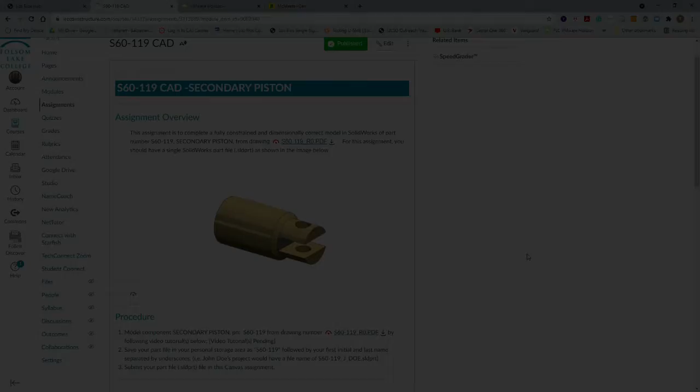Hello everybody, this is Todd Frazee again, and this is the CAD tutorial for the S60-119 secondary piston part.

Okay, so again, it's another part that'd make a lot of sense to revolve the base feature. You could extrude it and build it other ways, but I believe the least number of features would be revolving this first, cutting a slot in it, and then putting the hole through. So we're going to go to our drawing and take a look at it.

Yeah, it looks like its orientation is vertical, and in the front view you're looking straight on at the center hole, with the slot in the side view and top view. So we would start with a profile that we would revolve that would reflect half of the part. So we would be picking off these diameters and the chamfer dimension and the overall height and this 0.13 dimension.

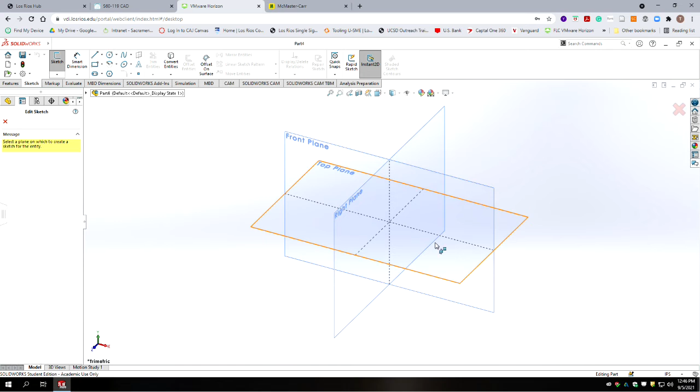Alright, so let's go to SolidWorks and set this up. Okay, so we're going to create a new part. Again, we're going to make all of our planes visible. And this time I'm going to go ahead and sketch my center line first. So I'm going to sketch a center line on the front plane from origin, and we're just going to go some undetermined amount straight up, and it's constrained vertically. Its length is the only thing that's not constrained.

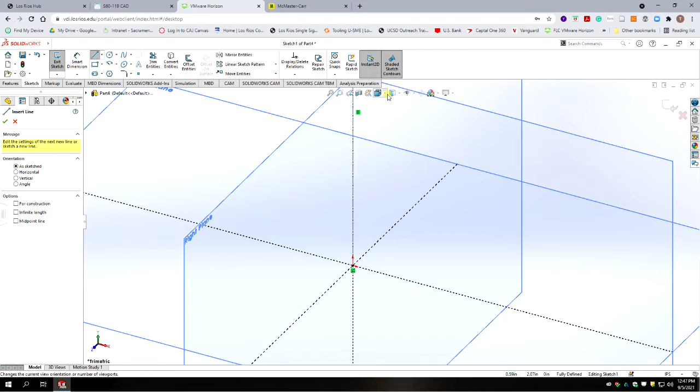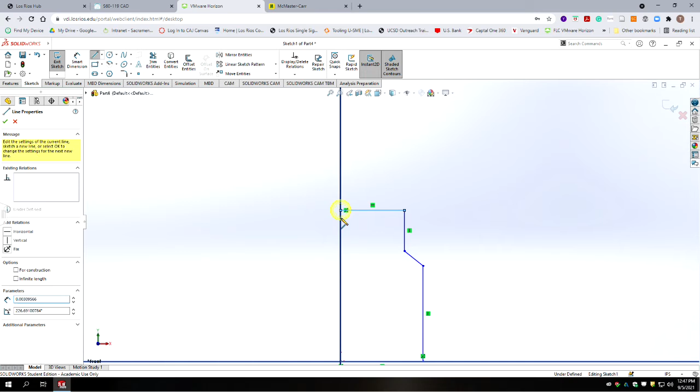And then if we're to draw the general shape of the part on the right side of this view, starting at origin, we would have a line going horizontal, one going vertical. We've got an angle. We don't really have a ledge, but we have it going straight up again to center line and then back home again to origin. So that's our general shape.

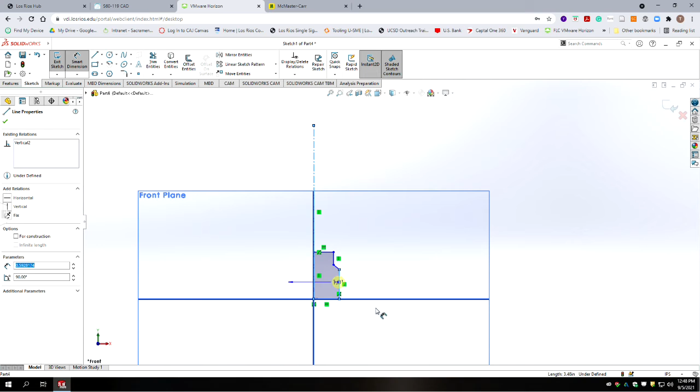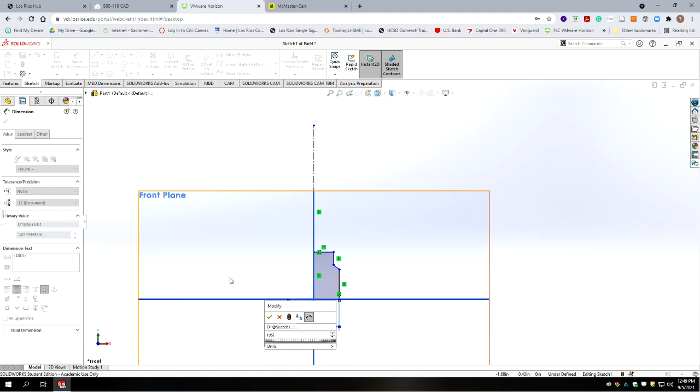Before we change the length of our center line, we want to throw our dimensions on to define our diameters. So if I go from center line to the outside edge, I can drag my first diameter, which is 0.194 to 0.197. So we're going to shoot for the center of that, 0.1955. Okay, so we've got our large diameter.

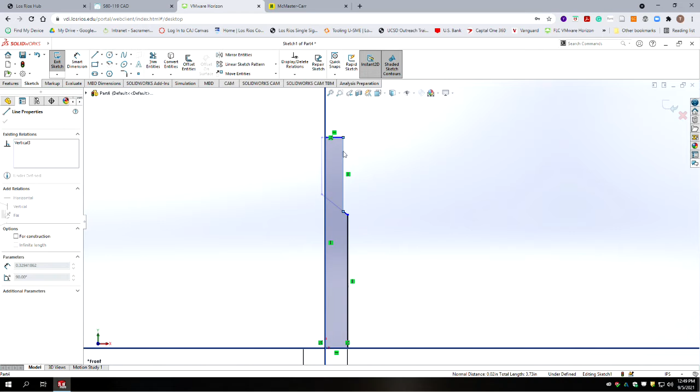You see this got a little funky, and that's just because of the scale of the dimension that changed. And this line is now on the wrong side of my center line. So I'm gonna exit dimension mode, and I'm just gonna drag that back over to the correct side. Okay, we're not gonna get too worried about it.

And then we're gonna do the same thing with the next diameter. We're gonna select the center line, and then we're going to select our smaller outside diameter, drag to the left, gives us a diameter. And if we go back to our drawing, that diameter is 0.157. And that gives us the proper diameter.

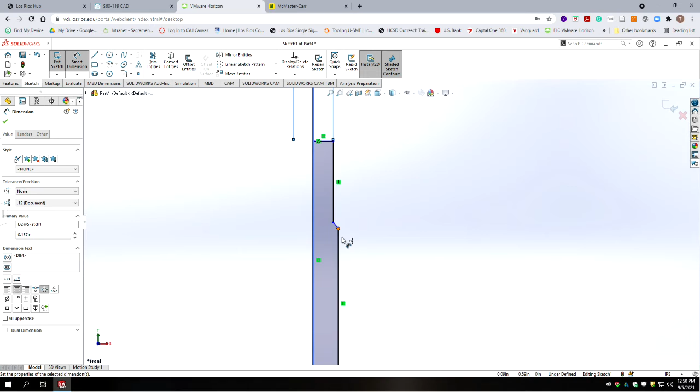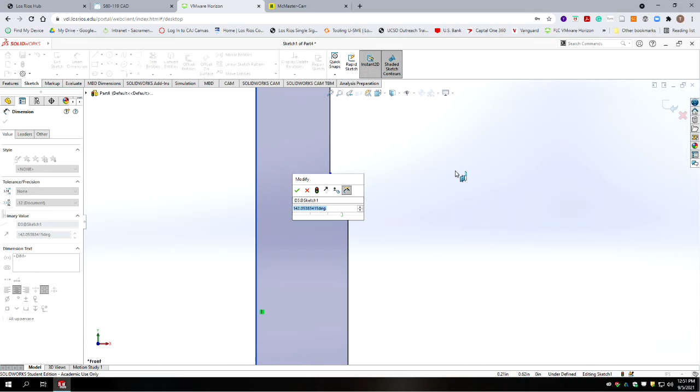Okay, so this angled piece here, or chamfer, we need to put a dimension on its angle. And it's a 45-degree chamfer, but with our angle tool, we're getting an included number. So it's really 90 degrees plus 45 for an inside dimension. So let's go 90 plus 45, and it gives us 135, which is the included angle we've got there.

Okay, and now we should just need height dimensions because we haven't put any in. We go back to our drawing. The overall length of the part is 0.43, and then the distance between the top of the part and the top of the chamfer is 0.13. Start with the smaller dimensions first, or it smashes your sketch up and distorts it more as you're working on it. So I'm going to start with the 0.13, which is the dimension between here and here. So 0.13. It's going to get real short.

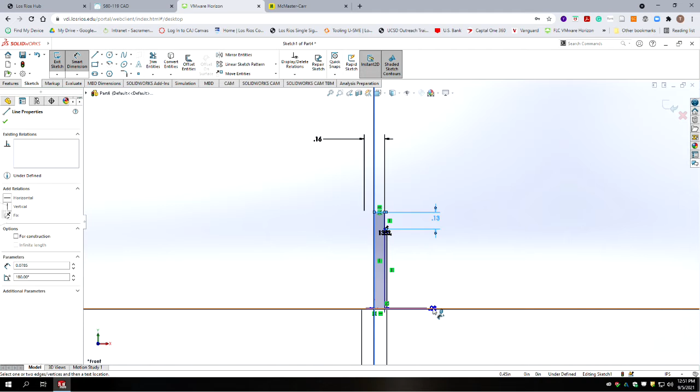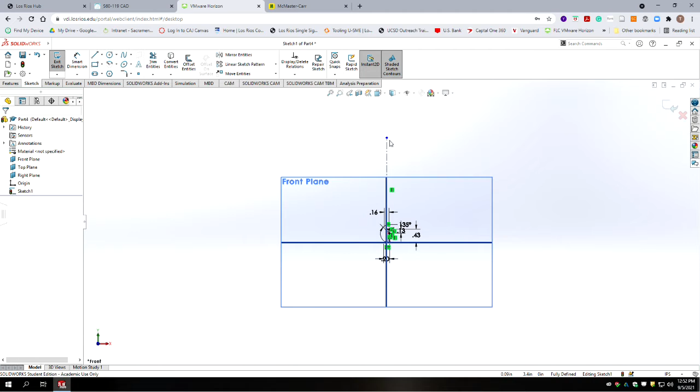And then we're going to do the overall height from the top all the way to origin plane. And that dimension is 0.43. Alright, so we should have everything constrained except for the center line. So let's go ahead and drag the center line down until it merges with the top of the part, and we should have a fully constrained sketch. This is what will revolve.

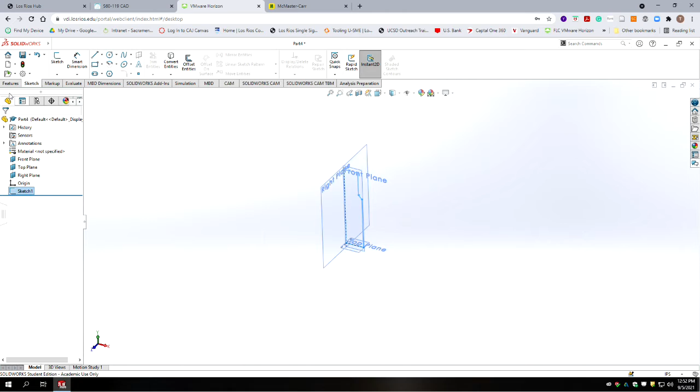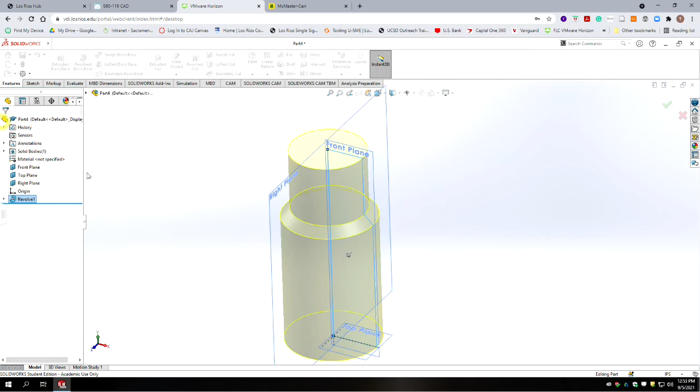So I'm going to exit the sketch. I'm going to rotate to a 3D view. We're going to keep the sketch highlighted, and we're going to go to Features, and we're going to make a Revolved Boss/Base. And it looks like it's auto selected, but if it doesn't do that for you, just select the left vertical line of the part, and that'll be your revolve. You want to go 360 degrees, accept that, and we have our base feature. Now, like before, I'm gonna make the standard planes invisible again.

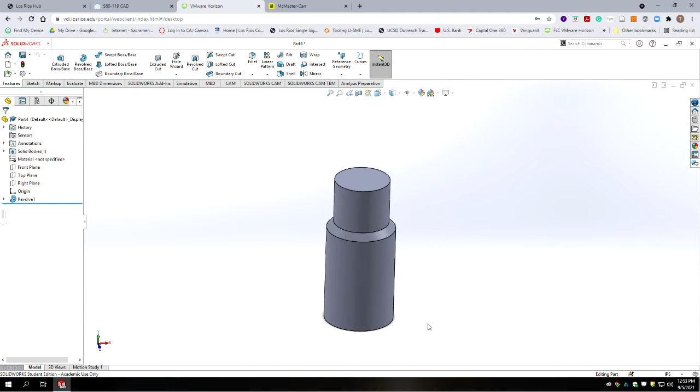We may turn individual ones on, but it's just a little less cluttered. Okay, let's go back to our drawing. If I were to look at this in the front view, what features would we see in our drawing? So we have a hole that goes all the way through, and we have a slot.

on both sides. So we're going to take this 161 to 159 number, and the number that would be halfway between there would be 0.160. So we're going to model our hole at 0.160, and it's going to be 0.059 from the end. So let's go back to SolidWorks, and we're going to make a sketch, and we're going to make it on the front plane. So we can still select it even though it wasn't visible off the feature tree.

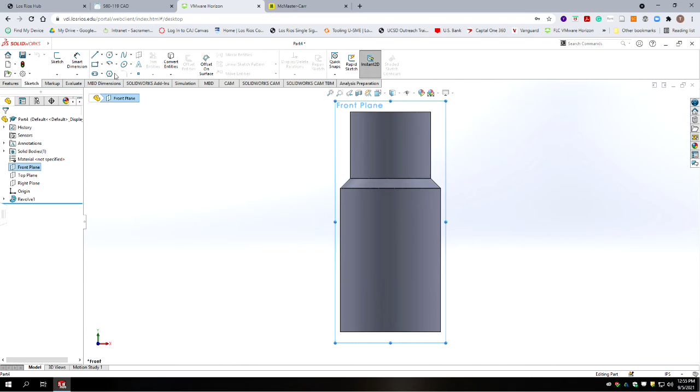And we're going to make a circle, and we're going to draw that in the plane. And we can take a center line, and we can go from origin to the center of that circle. And if we force that to be vertical, it should be in line with the axis of the revolution of the part.

And we're going to go back to our drawing and see where the location is. And the dimension for the center of that hole is 0.059 from the end. So we need to put in a dimension from the end. 0.059, accept that, and then we just need to give it a diameter, which was 0.06. Okay, so we should have a fully constrained sketch.

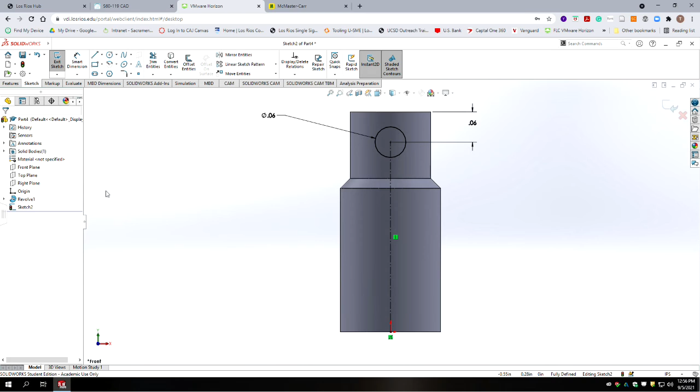We're going to exit the sketch, make sure the sketch is highlighted, and we're going to look at this from a 3D view. Now you notice the sketch plane for the front plane runs down the center line of the part. So what we're going to do is a feature. We're going to do an extruded cut. And it defaults to one side, of course, and blind. So we're going to make that through all.

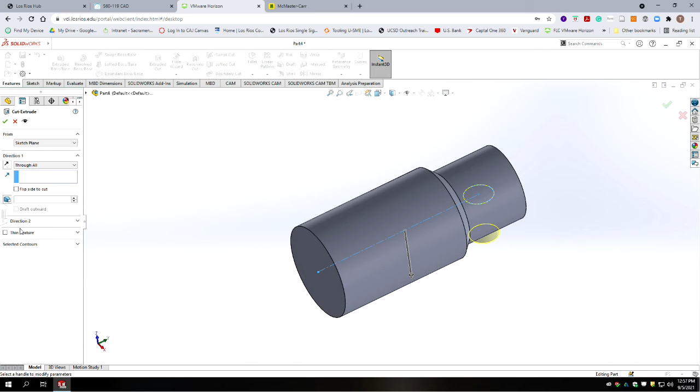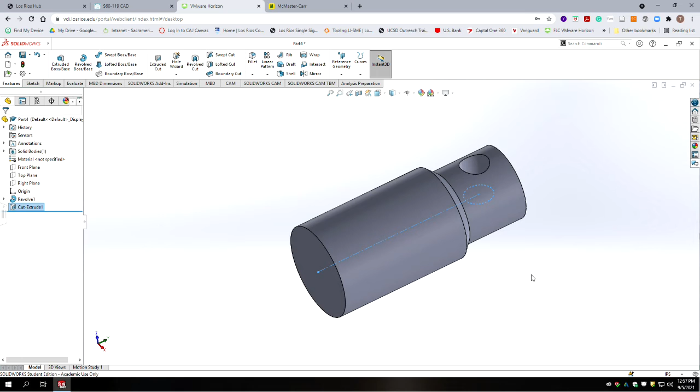And then we're going to have a second direction, which is unfortunate because in the software it's falling right on the tab for the VMware. So I'm going to minimize this for a second just so I can select a second direction. It's going to take the default depth that you had already set, so it goes through both sides. And I'm going to accept that. So now we should have a hole going all the way through the part.

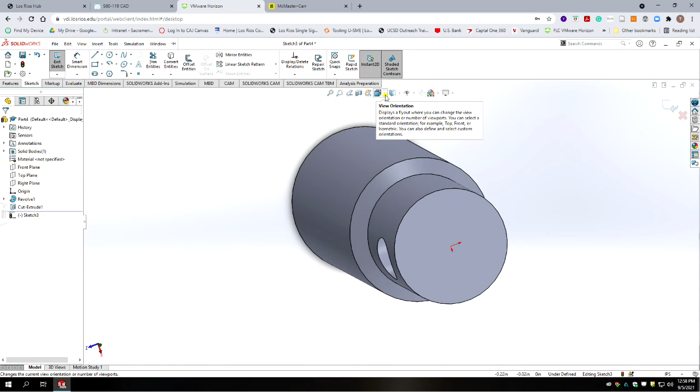Okay, we have one more feature to make, and that is the slot in the end. So we're going to make that from the top view. We're going to go sketch, feature, select on the top of the part. Let's view the part from the sketch plane. And in this case, I'm going to switch our viewing to hidden line.

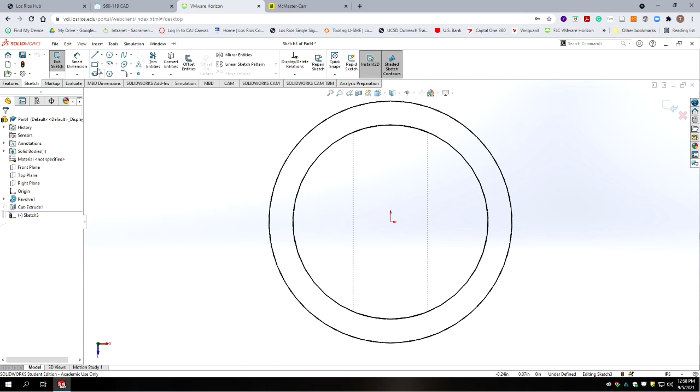Okay, we want to see where the hole is in orientation of the slot. So the slot we're cutting is opposite orientation as the hole. So the hole you're seeing in hidden lines is going vertically. We need to make our slot horizontal. So we're going to draw a rectangle that goes around center. Okay, and a quick way to center a box on a given point is to draw a construction line from corner to corner.

And we highlight that construction line and origin, and we want it to be on the midpoint. So it puts the midpoint of this line that goes from corner to corner on origin, so that no matter what size this box becomes, it will always be centered on origin. Okay.

So we need to put in a dimension for width, which on our drawing was 0.068 to 0.073. So 0.0705 would be right down the middle. So we'll use that number. And then all the constraint we need is something to tell it what the length of the box is. So we're just going to put in a number and accept that. And we should have a fully constrained sketch now.

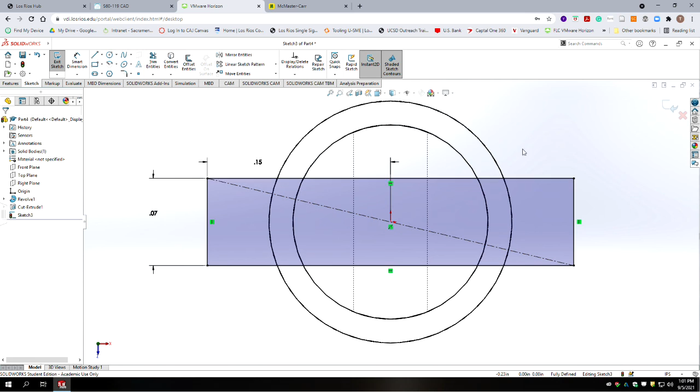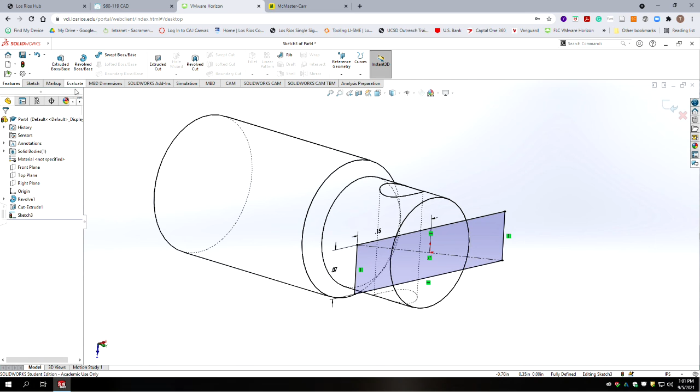So what we're going to do is extrude that down until it hits this intersection here, because I believe that's what it's dimensioned to. Yeah, it's 0.13. Okay, so we're just going to go with blind, and we're going to punch in 0.13 and accept, and we now have a cut. Let's switch our view back to solids with edges, and you should have that part finished.

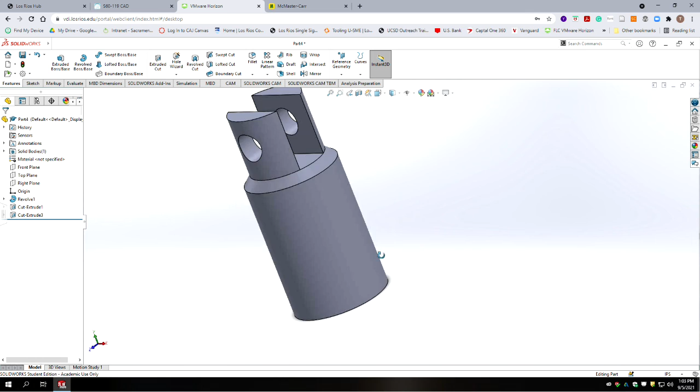Okay, so that's it. You can add properties to it, material properties, rendering if you like. But that's modeling the dash 119 secondary piston.